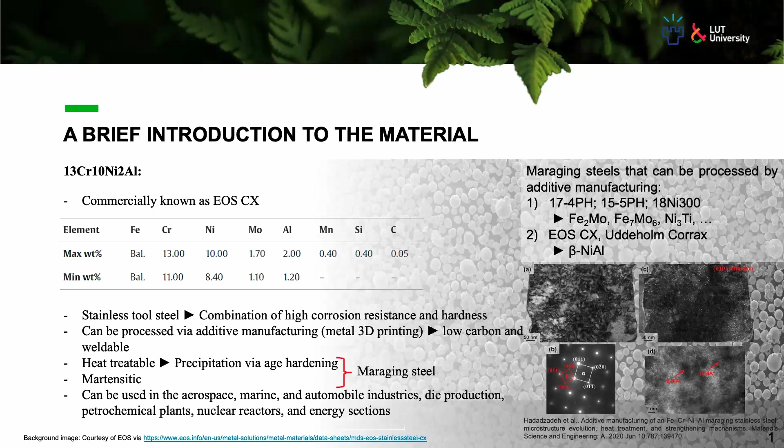Okay, so some of the results from our previous studies confirm the microstructure of this material after 3D printing as being martensitic, both in its as-built condition and even after heat treatment, the martensitic structure remains. However, after heat treatment, there is a slight difference in the texture and the size of the features in the microstructure. As you can see in these EBSD results, the left side is for the as-built material and the right side is after heat treatment.

And heat treatment caused a difference in the balance of the high angle grain boundaries and low angle grain boundaries. In addition to the martensite in the background phase, we also detected some minor amounts of retained austenite as red dots in this image, and the amount was below 1%. However, this below 1% retained austenite can have an important role in the mechanical performance of this material, as I will explain later.

And of course, after heat treatment, we can observe these nanometric beta particles that have a huge contribution to the strength of the material. So these are the general aspects of the microstructural features of this material after additive manufacturing and after the heat treatment that is designed for this powder.

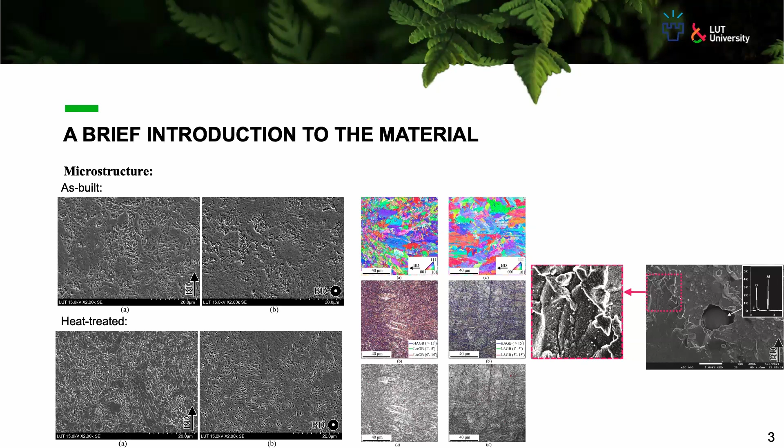And as you can see, the effect of heat treatment on the quasi-static mechanical properties of this material is significant. It causes a huge increase in the strength values from around 1,100 megapascal to close to 1,600 megapascal. And even after heat treatment, the ductility and elongation to failure of the material is significant. As you can see in this DIC image, even the heat-treated sample showed a very significant necking phenomenon before its final rupture.

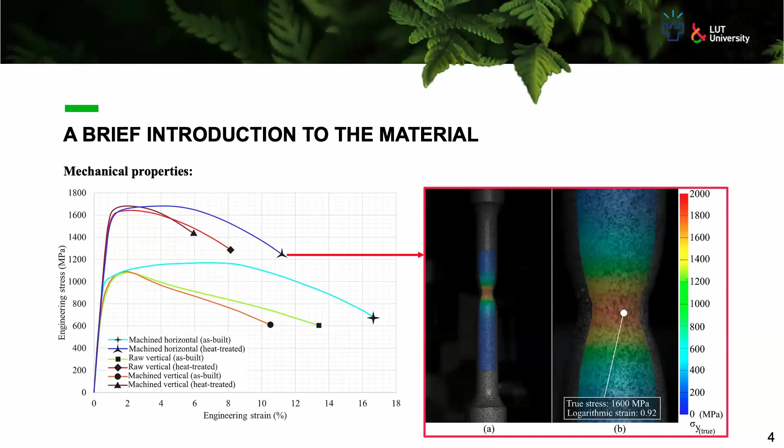So the combination of ductility and high strength is a perfect combination for many mechanical applications. And of course, we have the strain hardening aspects of this material as its major properties. In the as-built situation, we can detect a recovery stage in this material, which is not present in the heat-treated version.

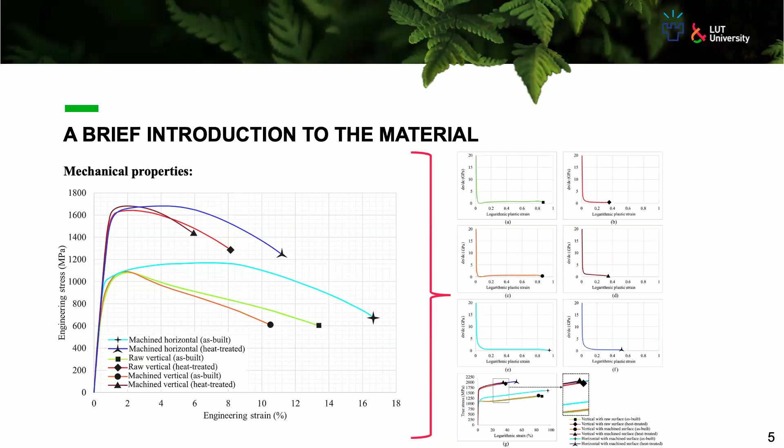And this recovery stage, later we attributed this slight recovery to that below 1% retained austenite in the microstructure. That's why it is so important from our perspective in the material, although the amount is minor. And after that, we tried to evaluate the fatigue performance of the material.

And one interesting aspect of these materials, these precipitation hardening materials, is that the precipitation hardening causes a huge increase in their quasi-static mechanical performance. In a significant amount of cases, such hardening procedures don't show a noticeable increase in the fatigue performance of the material.

The fact is that the high strength of these materials after heat treatment relies on the presence of these micro and nanoscale precipitates. On the other hand, the material becomes more defect sensitive, and even in some cases, these precipitates that are supposed to contribute to the high strength of the material can act as failure sites for fatigue, especially in high cycle fatigue case studies.

So if you test CX after heat treatment, MS1, or even in some cases 718, and you don't see any kind of improvement in the fatigue performance, don't be surprised. This can happen. And you can even see the failure initiation sites in the as-built and heat-treated versions are similar. The size of the defects and their presence are similar to each other.

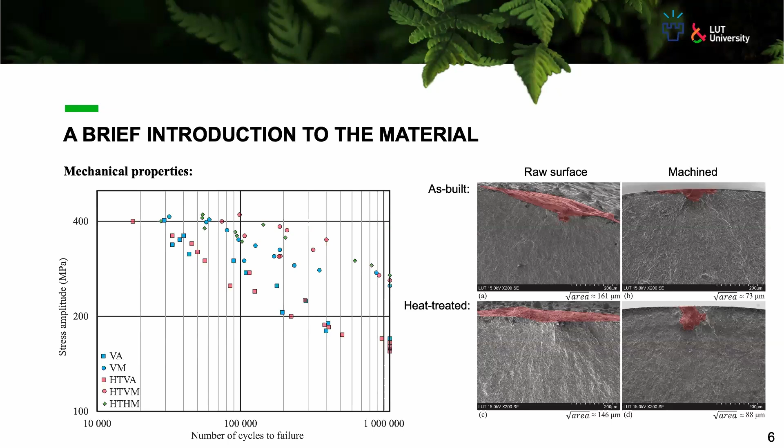And after all of these, let's get into the focus of this presentation, the mechanical performance of this material under high temperature. So as you can see, in the as-built version, up to 500 degrees, no significant change is apparent in the strength of the material. However, after 500, there is a sudden decrease down to 800.

The dilatometry results of this material from our previous studies show that this temperature range is the range that can cause precipitate dissolution in the microstructure. However, a high number of beta particles are not expected in the as-built version. So in this case, I think the tempering effect of the background martensite is a dominant factor, which also manifests itself in the increase in ductility because of the presence of carbides, but it's still low carbon. So the influence is not that significant, but it's still there.

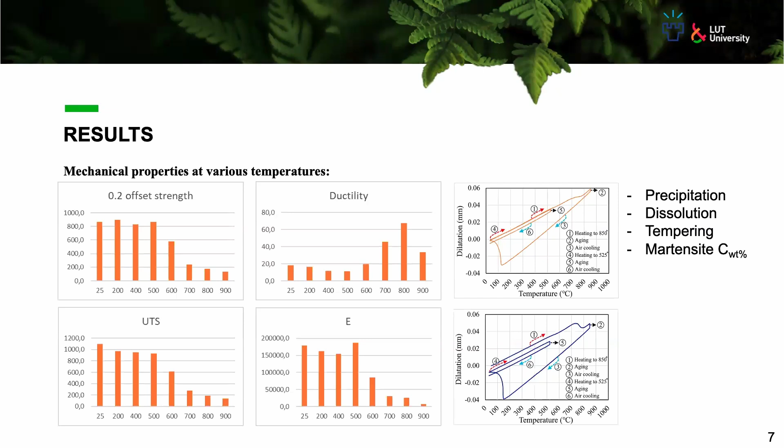But in the heat-treated version, before going to that, we can also consider the effect of residual stress after 3D printing based on our previous results. The samples after 3D printing show a significant amount of residual stress. The samples used for high temperature tensile tests were built in the horizontal direction. So if they are exposed to heat, these compressive residual stress values can go to 0. So it can also have an influence on these results here.

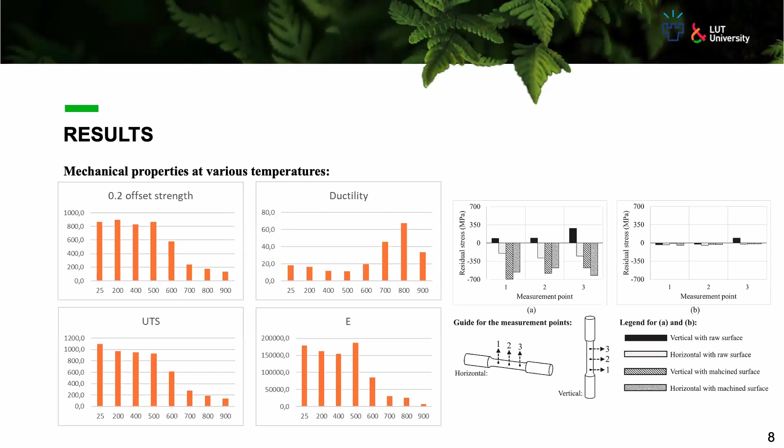And if you compare the behavior of the material at different temperatures in the as-built version compared to the heat-treated version, the heat-treated version had a more normalized behavior. We believe that's because the heat-treated version's strength and ductility heavily rely on the presence of beta particles, and its strength starts to decrease because by increasing the temperature, the solubility of these particles increases and they vanish from the background structure. Combined with the tempering effect of the martensitic phase, this causes a smooth decline in the strength values and, on the other hand, an increase in ductility.

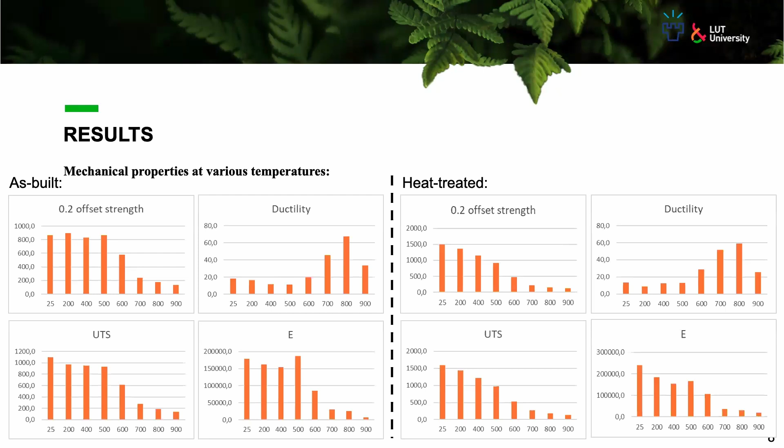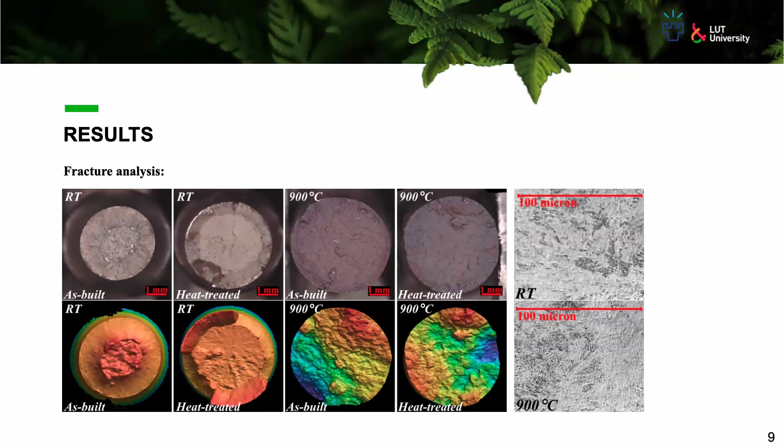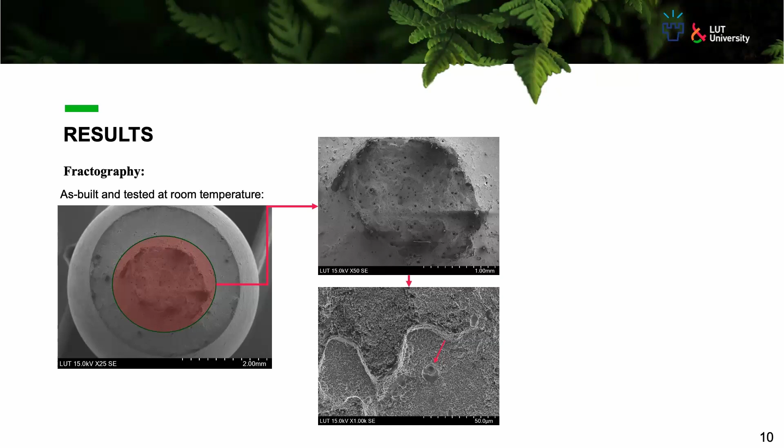And in the case of as-built samples, the damage was fully ductile. As you can see here, even close to the shear lips, signs of ductile failure are apparent, except for these huge voids that we believe were initiated by the detected aluminum oxide particles that were randomly in the microstructure. However, in the heat-treated version, the fracture was quasi-cleavage or semi-ductile.

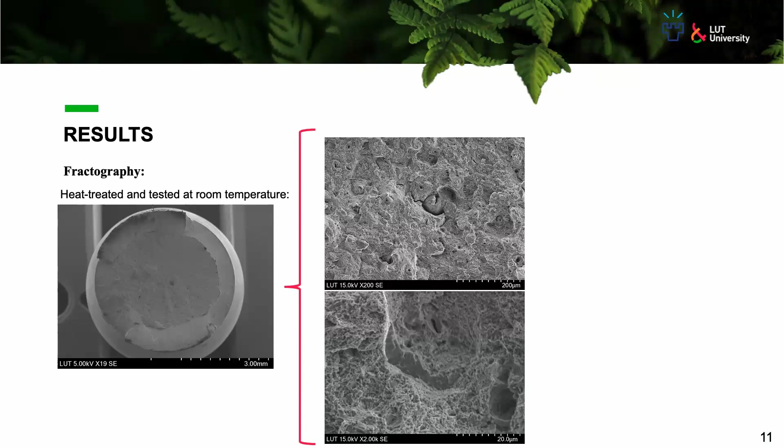The presence of some intergranular microcracks was also apparent. And at the micrometer scale, we also detected some brittle cleavage failures. However, their presence was not so apparent that it caused a brittle fracture in the specimen. And this is ongoing research, so this was the most difficult part for me, to make a concluding remark.

But based on what we have here and our results so far, we can say at high temperature for the as-built specimens, a complex mixture of tempering, recrystallization, grain growth, and of course particle precipitation and dissolution contribute to the material behavior, while for the heat-treated version, the mechanism is simpler. Precipitation, dissolution, and tempering are the main factors. Fractures were practically ductile regardless of the material condition.

The as-built material can be used up to 500 degrees if we consider the strength of the material as our criterion, as is recommended in many marketing data sheets. However, considering the smooth decline of the strength for the heat-treated version, defining a safe temperature might be a little more arduous. Thank you very much.